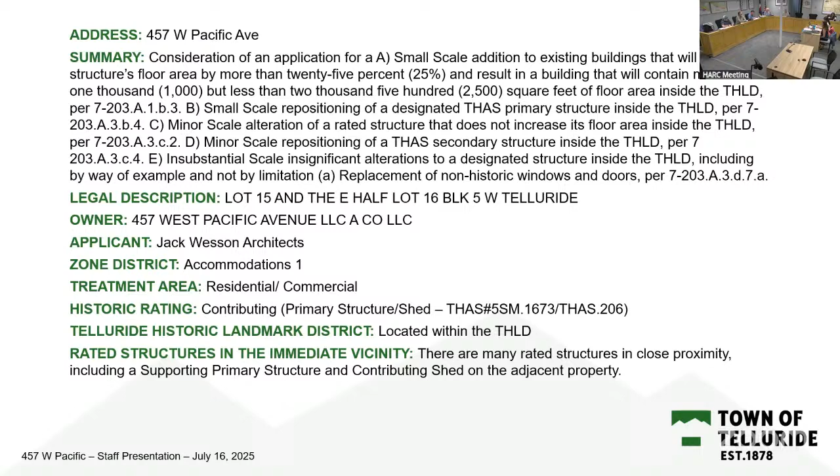That's just the high level for all of these projects. So we are looking at 457 West Pacific, as Mark stated. I will not review these items again. The only thing I'll add is that this is in the residential commercial treatment area, and we have two contributing structures on the property, a primary structure and a shed, which we'll talk about further later. This is located within the THLD, and there are a number of additional rated structures in close proximity to this property as well. So you see it here.

The site significance and context: 427 West Pacific is within the THLD. It's historically significant for its association with Telluride's residential development beginning in the early 1900s. And as I mentioned, both the primary structure and the shed are contributing.

The house and shed were built between December 1899 and July 1904 per the Sanborn maps. The house is architecturally significant and has only had a very minor loss of integrity. The shed displays a high level of integrity, but it is in a deteriorated condition. The gabled addition to the house's rear north elevation appears to date to a time frame between the 1960s and 1970s. It's a modest addition that's reasonably compatible with the house's original construction and minimally visible from the street.

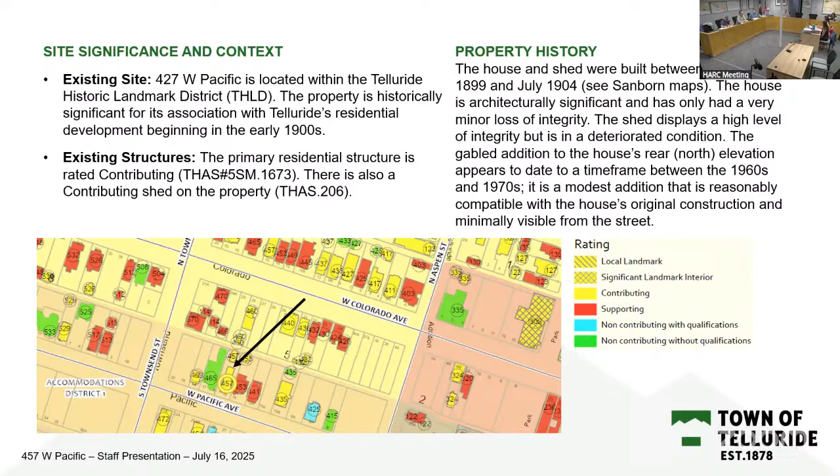HARC members have reviewed a detailed staff memo on the project, so I'm just going to quickly walk through key aspects. The project description: the applicant is requesting to restore and rehabilitate the contributing primary structure and shed, raise the contributing primary structure and shed, and also is proposing an addition and alterations to the contributing primary structure and shed. As you all know, the overall precepts of the design guidelines are to keep it simple, keep it in scale, respect historic resources, and make all new design compatible with the existing context.

For this particular project, the following standards and guidelines apply: rehabilitation, residential/commercial, alley, shed and secondary structures, and exterior and site lighting. The applicant has complied with a number of the guidelines and standards which apply to this project, so I'm not going to go through those they've already addressed. I'm merely going to highlight, for those present, those that need further revisions to become compliant, and/or where additional information is needed to make a determination on compliance with the design guidelines and standards.

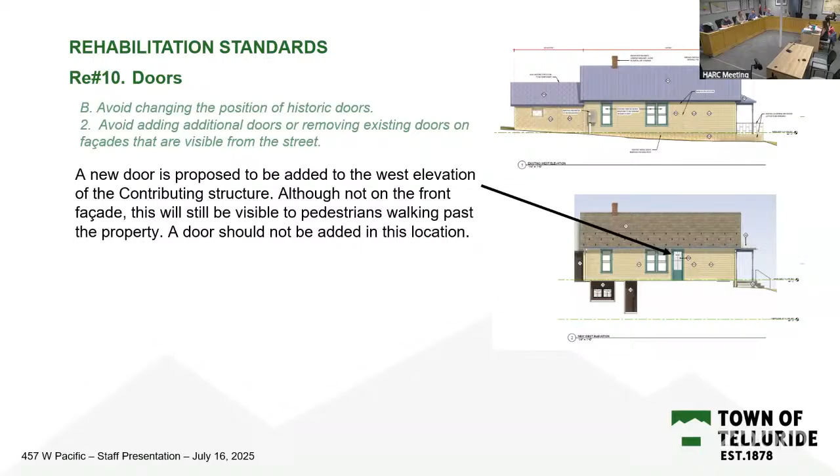Starting with the rehabilitation standards, number 10, doors. One aspect of that guideline is to avoid changing the position of historic doors and avoid adding additional doors or removing existing doors on facades visible from the street. A new door is proposed to be added to the west elevation of the contributing primary structure. Although not on the front facade, this will still be visible to pedestrians walking past the property. A door should not be added in this location. That's a staff recommendation, and you can see that here.

Rehabilitation standard number 19, new alterations and additions. The HARC board knows the provisions of RE 19. I'll just raise that the proposed new addition is not visually subordinate to the contributing primary structure when viewed from West Pacific Avenue. It's not compatible in size and scale with the existing historic structures on the site, especially the portion of the new addition that projects beyond the westerly wall plane of the contributing primary structure. Combined with the entire addition being significantly taller than the primary historic residence, this detracts from the historic character and integrity of the site.

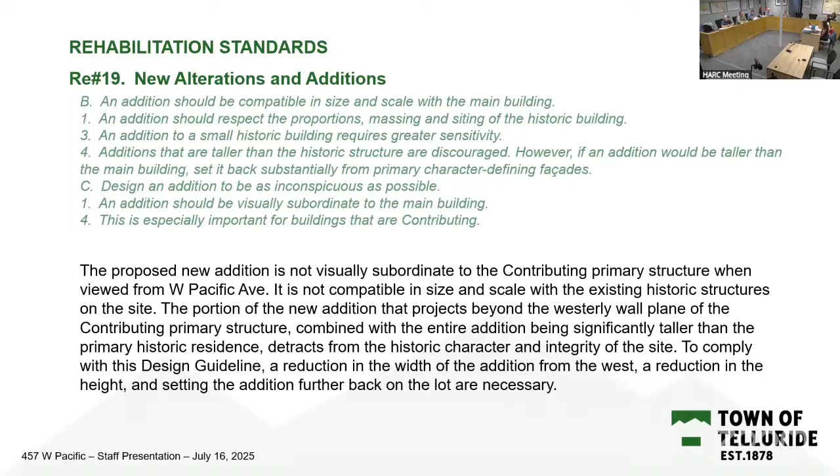And so staff would recommend, to comply with this design guideline, a reduction in the width of the addition from the west, a reduction in height, and setting the addition further back on the lot are necessary. HARC can consider whether some combination of those options are ones that you feel make this compliant.

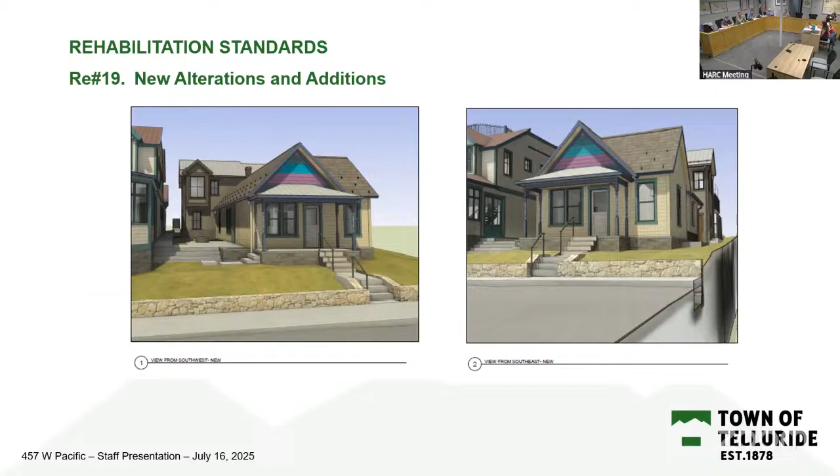And so you can see this is one view. I'm particularly looking at the west, but I would say the whole addition is very dominant, but especially from the west, you can see that here. I'll go quickly and then I can answer questions after the applicant presents.

So I'm also flagging very briefly in this presentation, and more detail in the staff memo, items that just need additional information in order to make a determination.

In addition, just additional information in order to address historic features and materials, historic elements, missing building components, windows, and wooden siding. We need some additional information.

We do have in sheets A1-0.9, A1-0.10, and A1-0.11 high-level annotations on the proposed rehabilitation, repairs, replacement, but we really need a detailed rehabilitation plan in order to be able to approve the project. This should include technical procedures to be adhered to, established procedures for determining the need for replacement only for elements beyond repair, documentation standards, etc.

So currently there's a lot of flexibility, as you saw outlined in the historic structures repair sheets. So concrete guidelines should be established to ensure that the integrity of the contributing primary structure and contributing shed are preserved and that replacement is minimized to the greatest extent possible.

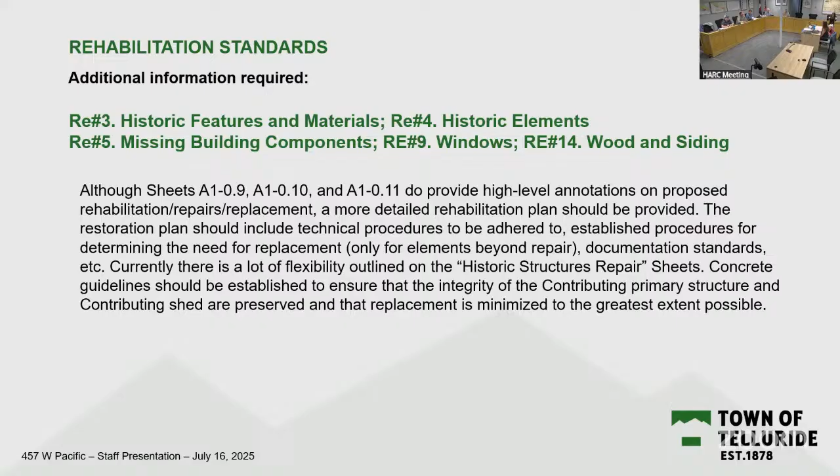I will say that I believe that's the applicant's intention. I just want to make sure that we have in writing what that detailed plan is, but they certainly are very focused on that rehabilitation. But I need to see the specifics in order to say we should allow what's being done to move forward.

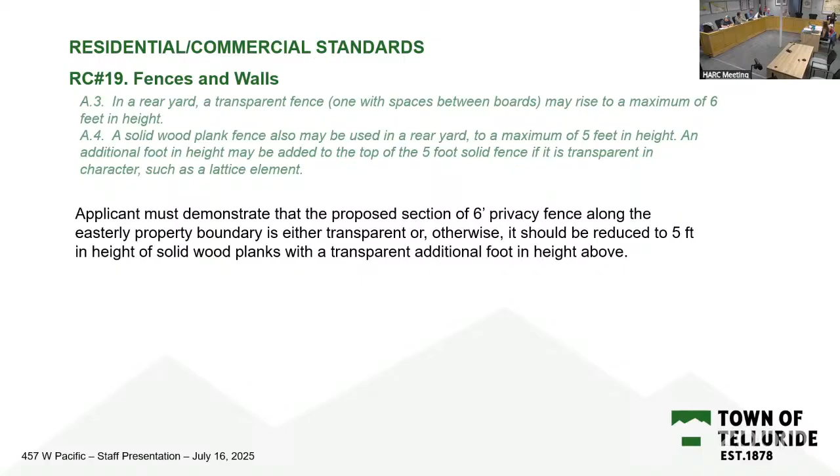Fences and walls, you all know the RC number 19. I've moved on to residential and commercial standards. This pertains to the fence. Applicants must demonstrate that the proposed section of 6-foot privacy fence along the easterly property boundary is either transparent, or otherwise it should be reduced to 5 feet in height of solid wood planks with a transparent additional foot in height above. So you can see it's just a section of fence, but it doesn't specify transparency.

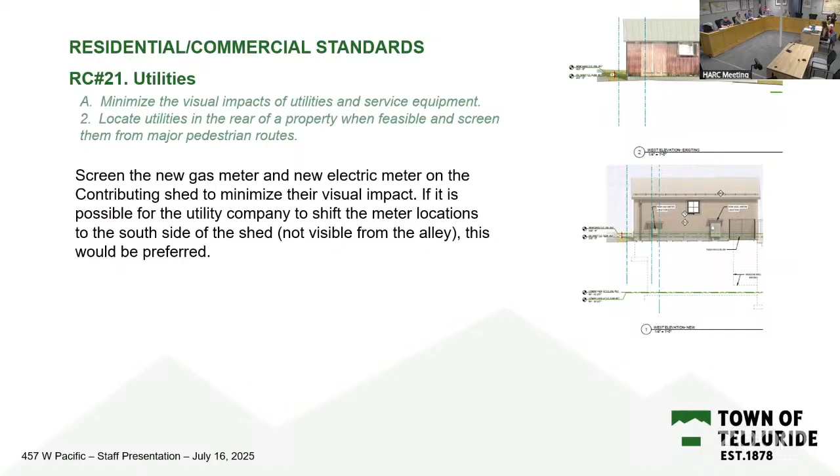Moving on to mass and scale, which we all feel should be number 1, but I'm doing these in order. You all know the guidelines. So...

Staff finds that the proposed new addition is not visually subordinate to the historic building. It changes the perceived mass and scale of that historic residence. You've heard me say this before when I was speaking to the previous guidelines in the restoration section. It's conspicuous from Pacific Ave, especially the portion that projects out to the west of the historic structure. And the height of the addition also increases the perceived massing and makes the addition feel dominant.

And then I'm also suggesting removal of a window on the south elevation because it really does add to the perceived massing and detracts from the contributing primary structure. So I'll show you that visually here.

Hang on one moment. I'm kind of going through two standards, so I'll go back to the one I just flipped through as well. Let me do them both at once, then I can show you some visuals. So RC number 31 is windows. You all know those standards.

And in addition to the mass and scale, as we look at the windows, which are character defining features, the placement and grouping should be similar to what's seen historically. And in this case, the amount of glazing on the north facade is extensive and should be reduced. They're visible from behind the contributing shed. The windows on the second and third levels are square, so we're also looking for more verticality.

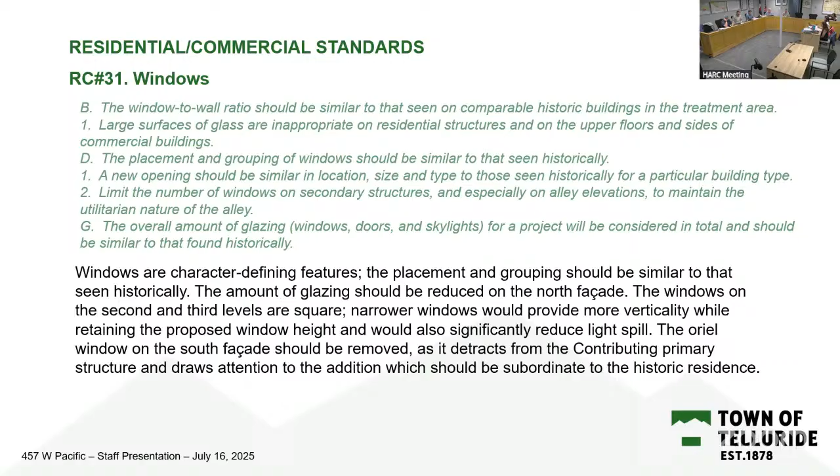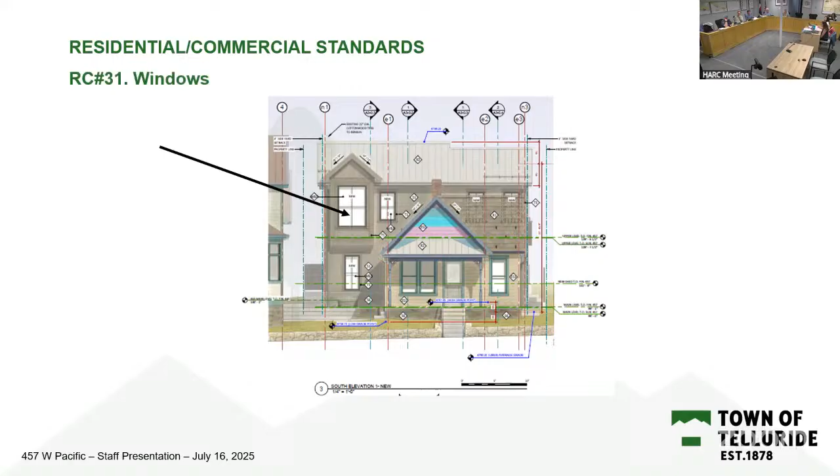And then I'm just pointing an arrow to the window I would suggest is inappropriate, and really it adds to that dominance of the addition that is proposed. And so suggestion to remove that.

Also in the residential commercial standards, additional information required. Plant materials, I've already said this, previous standard. And again, just looking for a more detailed landscape plan. And I added here that the replacement trees that are proposed, I just want to ensure that they're not going to block views of the front facade of the historic primary structure as they mature.

So there's a balance here. There's some trees being removed, just the location as trees are replanted, making sure that over time we're not losing that visibility. And I can work with the applicants on that.

Building materials, I just want more clarification on one of those specs for roofing, just to make sure that they are compliant. It wasn't clear. Visually, it appears potentially compliant, but I just want to be 100% certain, given that it's not clear in the list.

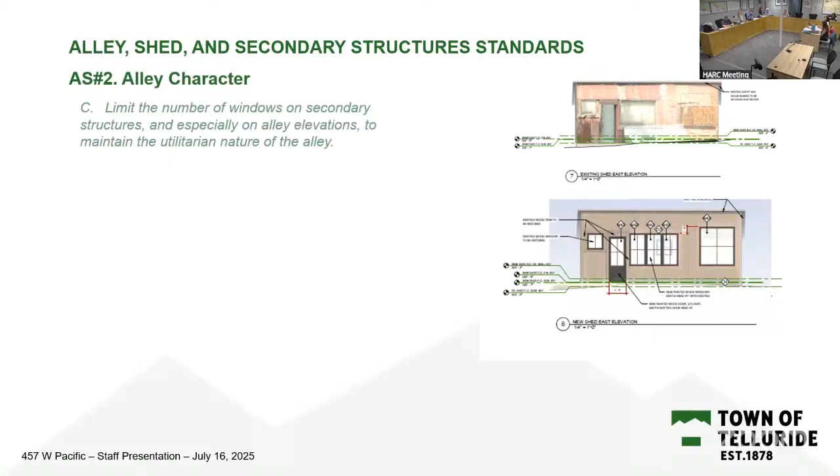Here, alley character, I'm almost there, guys. You know what the standards are. We're saying limit the windows on alley elevations to maintain the utilitarian nature of the alley.

So in this case, the east facade of the shed is proposed to have 5 windows. You can see those below, and above is the existing, including one large square window that does feel out of proportion and not in character with the shed.

I see that the applicant is trying to be consistent with existing openings to the extent possible, but that one window at least may not be - should be something we request to be replaced with something smaller and with more verticality.

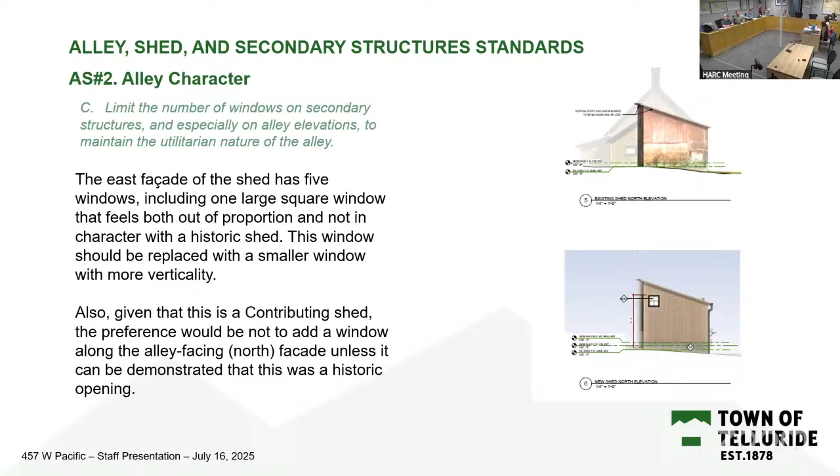And then on the side of the shed on the north elevation here, since this is a contributing shed, the preference would be not to add a window along the alley facing north facade, unless it can be demonstrated that this was a historic opening. This is not something we would prefer unless the applicant can demonstrate that.

So now I'm on the exterior and site lighting standard, AS number 2, interior lighting. So we're looking for that minimization of visual impact of light spill from a building, and large areas of glass and exterior walls that allow for that spill. We need to be attentive to.

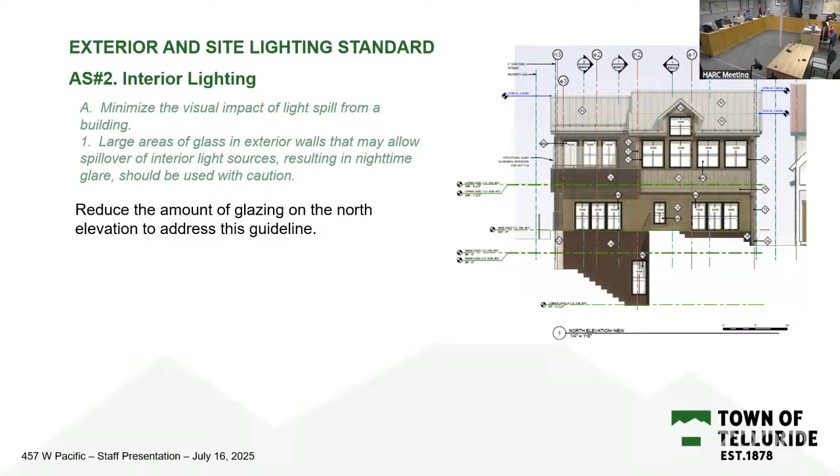And in this case, again, the shed is blocking to a limited extent a bit of this, but you have a lot of visibility from the alley towards the north facade. And so recommendation to reduce the amount of glazing to address this guideline.

Overall, as you all know, there will be Public Works, Planning and Building staff reviews. They've already reviewed to a certain extent the project, but after HARC approval, if it were to be approved, this project goes through another round of extensive review prior to building permit issuance. And any elements that fall into that timeline should not impede the HARC review process.

Staff will ensure that these items are addressed at the appropriate time, including things like drainage, site runoff, retention and filtration capacity on site based on final plans, landscaping, irrigation, a detailed utilities plan, on-site snow storage, all based on final plans. So I just always put that out there.

And so, staff findings and recommendations. The applicant proposes to rehabilitate a contributing primary structure and a contributing shed. The project is in compliance with many of the town of Telluride design guidelines and standards. And again, I just focused on those that need to come into compliance. In some cases, additional information is requested in order to determine and ensure compliance.

There are a number of conditions listed in the staff memo that would need to be addressed to come into full compliance relative to mass and scale, particularly to ensure that the addition is subordinate to the primary contributing structure. So in your packets, I outlined a detailed motion. I won't go through each of those elements here, but I'm happy to bring these slides back up as you talk through them later, if that's helpful for reference. Otherwise, you do have your one sheet reference copy there, but I'm proposing to continue to the September 17, 2025 HARC meeting with the conditions listed.

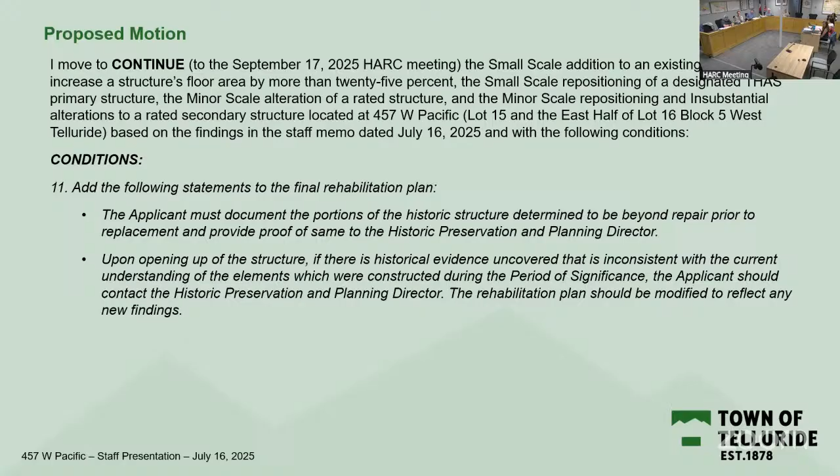The last condition is merely to add to the rehabilitation plan standard language to ensure that we as staff are able to keep an eye on the project as it moves forward. So you really have 10 conditions. The 11th is just pertaining to the rehabilitation plan. Thank you very much. Happy to answer questions after the applicant presents or whenever you would like.

I have a question. I think you covered all the relevant design guidelines, but I have a land use code question. On page 2 of the packet, where it shows 2,106 square feet of site coverage for the primary residence - does this include the 6-foot connector, or if it's less than 6 feet it doesn't count, but does it include the square footage of the connector?

It should, and I will double check that. Did you calculate this? We did as staff, and I believe it does, but I will double check it if that's something you're concerned about. Let me ask a bigger question - I got back yesterday and didn't have time to go back to the land use code, but aren't primary structures at 45% in this district for site coverage, not 50?

Aren't they 45%? I believe this says proposed 49.9 or 50%, but I thought it was 45. Well, I will double check that. Staff did review based on the land use code, but again, land use code is outside of the purview of HARC. I am happy to look - it's not supposed to be over.

It's not compliant. So I would ask staff - is it 45%? I believe so. So this is non-compliant and this is wrong. That's not right. Okay, go ahead. I need to go back and look because I can't confirm that on the spot here.

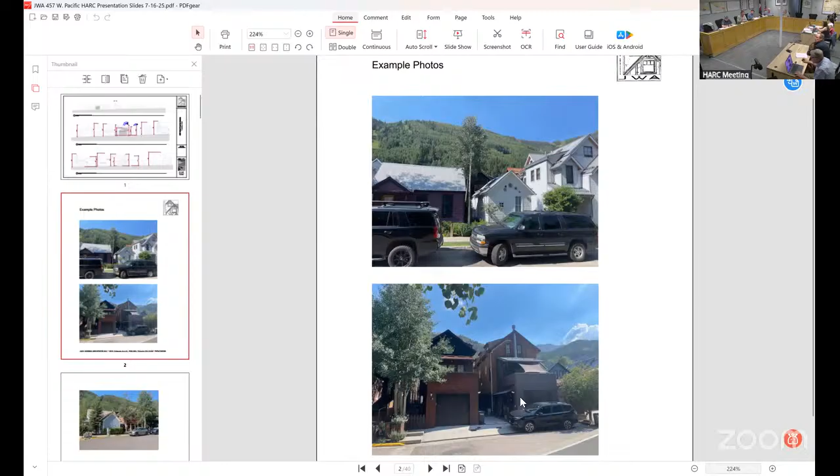These are just down the street. You can see the variation between the historic structures in the front and the additions in the back.

I want to go quickly through these, so spin your finger fast. This one right here is an example where the lot was a lot wider than the house, so they built the structure higher and taller. As you can see on the side, it's about 8 feet taller than the historic structure. That's an example of the addition visible from the side. Yours is 8 feet taller than the gable on the small historic cottage, right? That's correct, so this is about the same.

This one's not attached, just down the alley, same zoning, secondary structure. It gives us the idea of an improved secondary structure volume. On the lower one, just two houses away, the historic structure has a gable running east-west, which is actually kind of common on that street. There's a handful of them, so I didn't feel that having the east-west gable was unordinary. You can see the structure behind it is 14 feet taller, but because of the way the one house is in front of it, you don't really see it unless you're in the right spot.

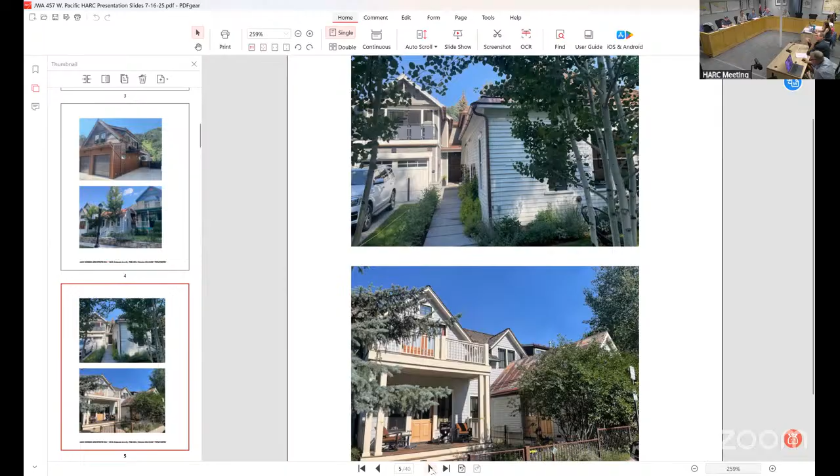Go ahead to the next one. This is an example of a couple, not on Pacific but on Oak. There's the historic house in the front with the new structures behind it and to the side. Those were approved right when I got on board with you.

This is an example of an addition onto a historic structure that went the full width of the lot, coming out on both sides of the historic structure. It didn't have a connecting link, so it didn't define as well what was old and what was new, which is an important distinction. I could get rid of the link and increase that volume, but I'm very sensitive to having two standalone-looking structures.

Next one. You can see also the back is actually 3 stories tall. Here's another one. Sorry, go one more. There you go.

This is just across the alley, on Colorado. So you have the 1-story, and then the higher structure in the back, and this is where the lot falls off. So you actually have 3 stories visible from the back on the addition, whereas I only have 1 and 2/3 story from the alley visible because the grade's coming up.

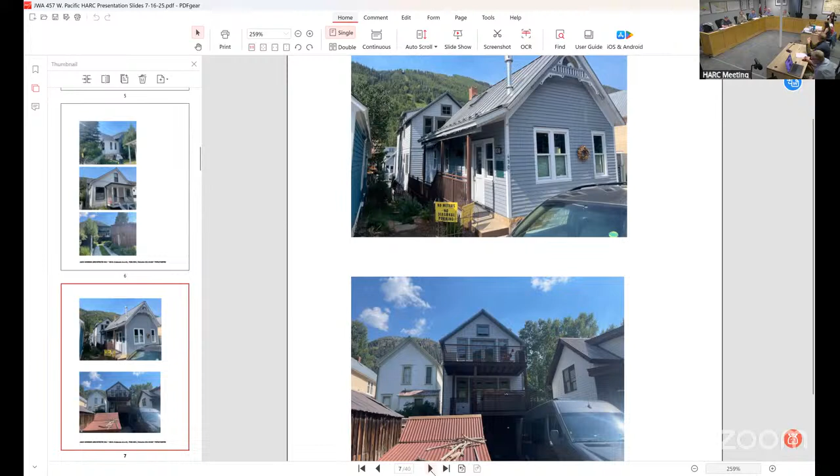Go to the next one. This is just an example of the addition on the right side of the historic house. Here they're about equal height, but there's no linking piece between them - one roof line merges into the other.

You may remember the comments, Mark, when we walked up with the guy from Denver - that gable was 3 feet lower than the main house, so subordinate meant subordinate. Well, you can see on the other one it looks about the same height, and they did add a dormer on the side of the historic structure as well. So there is precedent for adding windows on the sides. Here's the next one.

This is an example - you can see the addition on the side of the house, and then the addition behind relative to the house itself. So the addition is much larger in volume. Go to the next one.

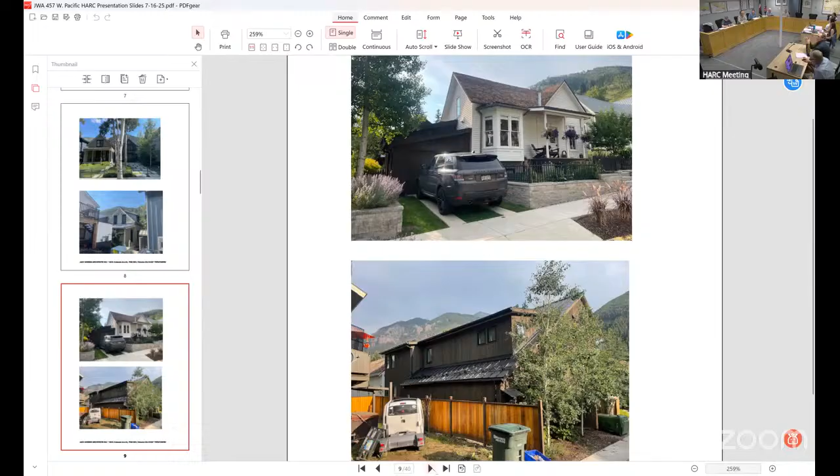I don't want to race through these, but here again this is the one-story house in the front with the addition in the back, which is 2 stories. You can see what it looks like in the back, the full 2-story structure. Next one.

Here's a condition where it's not as steep, but where you have the historic house on the downhill side. It's more common that the unit in the back is much higher. So here the unit in the back is a full story higher than the main house. You can see the length in the lower photograph - that's all one house. This is a very comparable situation, although the grades are a little more severe.

Here's another example: one story in front, with a slight grade going uphill in the back. The addition is 2-story in the back. Upper one, you can see the 2-story structure, the 1-story historic house in the front.

That was just approved the last 4 years or so. And then the one below the historic house, the problem is it has a linking piece to the historic part in front, but the part behind doesn't distinguish itself from the historic, so you can't tell apart what's new and old. That's the problem, although the massing is typical of having a 2-story addition.

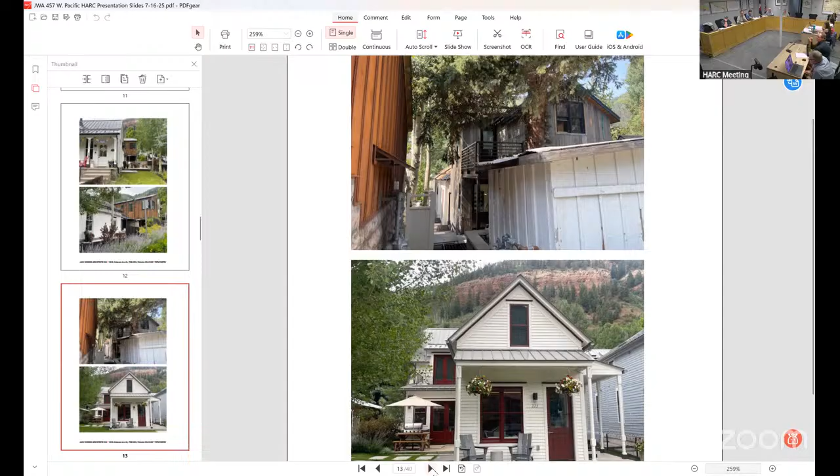There's just a couple more here, but there's a very common number of examples. The one on top, that's the 1-story off to the side. It's a 2-story addition. That's my house, that's another example. And below it, you can see the amount of addition onto the historic house. That was a 1.5 story historic house, but the addition's taller and larger.

So there's obviously a huge precedent for getting all of your zoning max allowable above grade on the back of these historic structures. Here's an example of one that's only half - we're only adding half of what we could. I hope that's appreciated, because I don't know what else to do. I just made a 1-story addition.

I feel very strongly, I'm just reiterating that there hasn't been a project with less mass added to one of these historic structures. And the location of the mass is set back from the alley 30 feet as well - it's not a full 2 stories from the alley. So I'll stop there.

And everything else we talked about—keep the meter where it is, but screen it, would be fine. I don't think we want to move the shed. We don't want to move anything else. So I think if that addition is simple, perhaps it moves a little bit less to the west, maybe another couple feet over, so it's not that big thing you see.

Because it is going to be visible. I walk that street every day and I know it will be visible. But I'm not sure there's really a need to reduce the height of it at this point. Maybe we can see that diagram and see what it does. Okay, that makes sense.

I think those are good points and I would agree with you. Okay.

I think I'll weigh in, but I think we're gonna want to continue and see this again because of the mass and scale issues.

Sympathy has nothing to do with it, but on the guideline about the new door, I agree with some of the comments that if we could see how far north you could move it. I have a way to write that if you want it: eliminate or move further north the proposed addition of a new door on this side.

Sounds like we're setting you up to make the motion. Uh-oh, so pay attention. Okay.

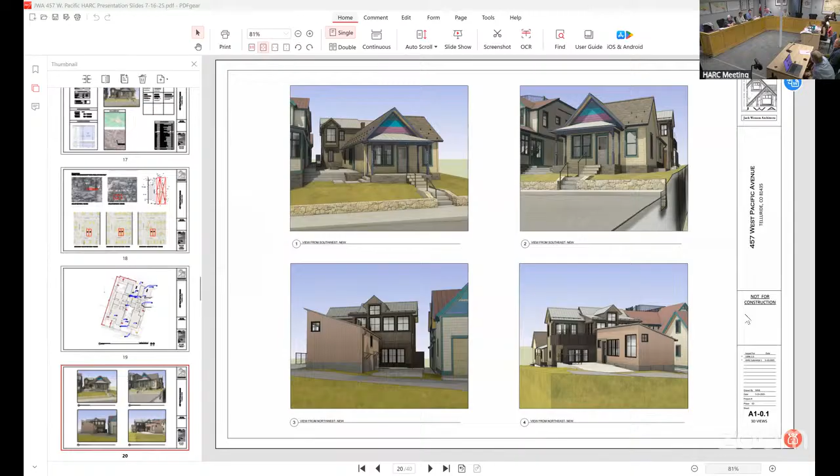Okay, we have a motion. I'll second it. How do you vote? Karen, yes. Stacy, yes. Matt, yes. Mark, yes. Bob, yes.

Thanks, guys. Okay, all right, thank you. Good luck.

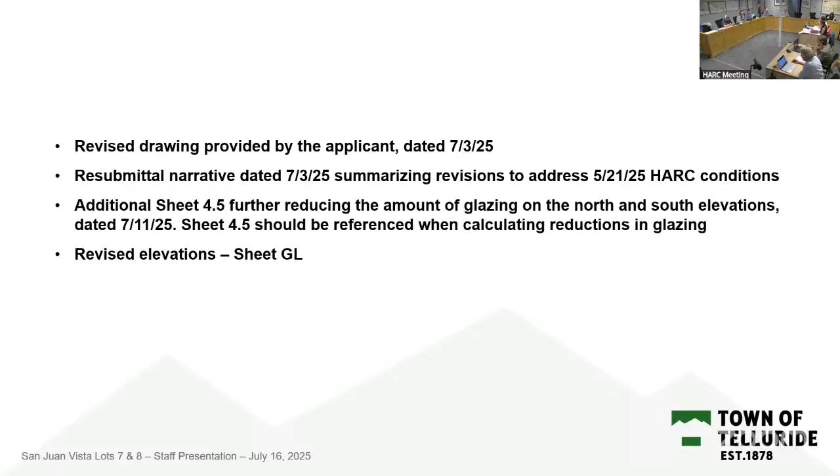Sheet 4.5 should be referenced when calculating reductions in glazing because they went much further than they had initially. They also subsequently provided revised elevations that were included in the packet and posted online at the same time as the original packet. They have since gone through and updated their entire packet, but I could not add that into what you saw and what was posted online at that date. So please reference those last 2 sheets for the glazing aspects.

Site significance and context, just to remind HARC members, but also members of the public: Lots 7 and 8 are located on the north side of Colorado, to the west of the Hotel Telluride and the south of the middle high school playing fields. Both are relatively flat lots.

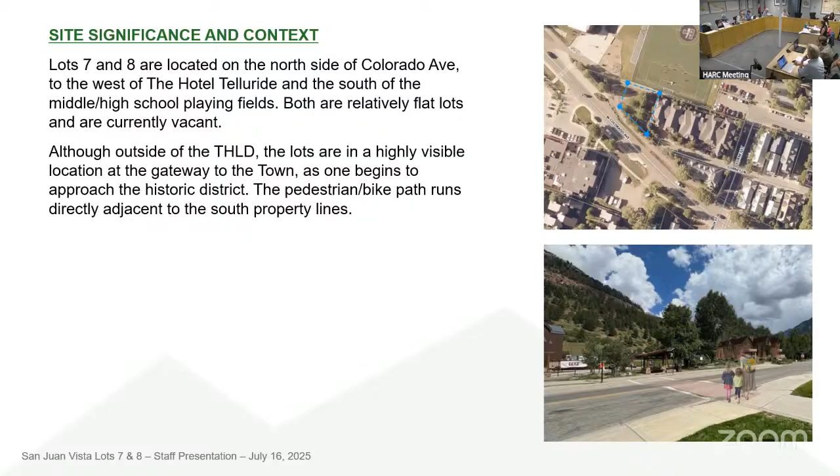They're currently vacant. Although they're outside of the Telluride Historic Landmark District, the lots are in a highly visible location at the gateway to the town as one begins to approach the historic district, and the pedestrian bike path runs directly adjacent to the south property lines.

The lots are part of the San Juan Vista PUD. They're located in the accommodations 2 zone district, which allows higher densities than the residential districts in town. The San Juan Vista PUD places additional restrictions on the lots while also allowing for some additional flexibility. For example, the PUD specifies a minimum and maximum number of dwelling units per lot.

So we went over the overall precepts of the design guidelines earlier. For this project, the accommodations standards and guidelines apply.

Project review to date, just really quickly: on December 18th, the applicant came for that HARC work session. On February 21st, the P&Z chair approved a minor subdivision per land use code section 6403B to adjust the interior lot line. This minor lot line adjustment provided the applicant with the lot configuration needed to design the project to be consistent with the design guidelines, while at the same time constructing at least the minimum required number of dwelling units per lot per the PUD.

So you can look at the surveys, you can see that lot line adjustment, and that followed from the work session discussion and made the project they're bringing forth possible and much more consistent.

On May 21, a HARC public hearing was held on the preliminary large-scale new construction. It was continued with 7 conditions. These are the 7 conditions. I'll go through them one by one quickly.

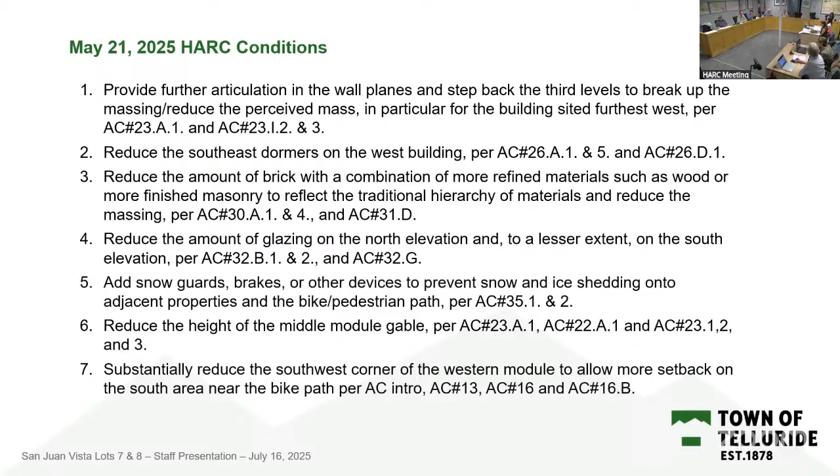The first one was: provide further articulation in the wall planes and step back the 3rd levels to break up the massing, reduce the perceived mass, in particular for the building sited furthest west.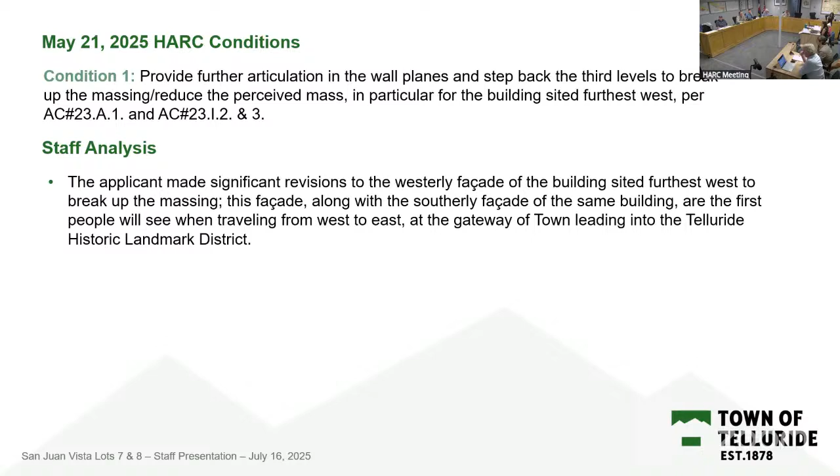I will have the applicant show the visuals. I know they plan to walk you through their revisions, but the staff analysis is that the applicant made significant revisions to the westerly facade of the building sited furthest west to break up the massing. This facade, along with the southerly facade of the same building, are the first people will see when traveling from west to east at the gateway of town leading into the Telluride Historic Landmark District.

In addition, as before, the project is divided into 3 modules to better reflect the traditional scale of construction. The scale of each of the modules is appropriate in the surrounding context. The buildings themselves step up from west to east. The center module has been reduced by 1.5 feet to provide a step up between the west and east modules. The PUD constrains the heights such that the lowest height is furthest west, and it steps up already, and they've just made some modifications to that.

The applicant has also employed porches, bays, and balconies to break up the front facades along Colorado and provide a step back from level 1 to level 2. This goes a little further, just on this one.

The others are briefer. In addition, to address condition 1, while the applicant has taken steps to address that condition, the front facades have not been revised to step back at the 3rd levels to minimize the perceived mass as viewed from Colorado. So you can see that there's a step from level 1 to 2, but not from 2 to 3 on the front facades.

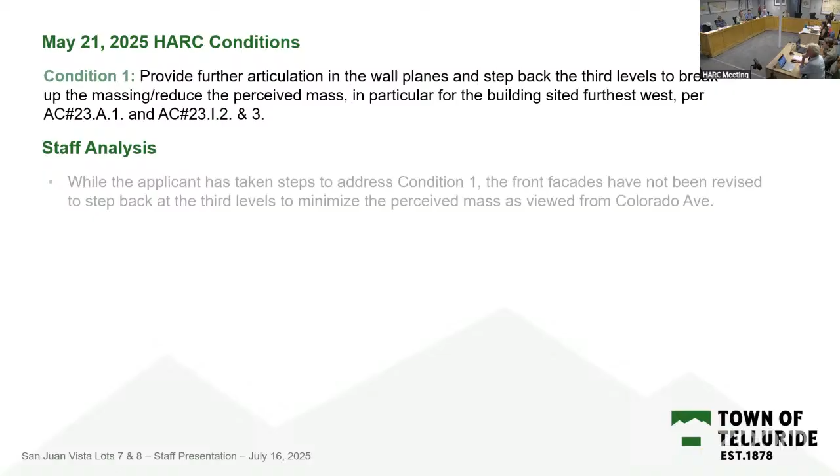That said, the cumulative revisions proposed could be found to make this aspect of the project substantially compliant with the design guidelines. So while they haven't met condition 1 in exact terms, they have reduced the perceived massing and achieved that through other approaches. HARC can discuss whether they feel further revisions are needed to address condition 1, or whether the revisions made reduce the perceived massing to an extent that the intent of this condition has been met. Staff would suggest that condition 1 has been met, and you can discuss further.

Happy to answer questions. Condition 2 is to reduce the southeast dormers on the west building. The staff analysis is that the southeast dormers on the west building were moved to the west side of the building, so the width of the southerly dormer was reduced. The width of the northerly dormer has not changed.

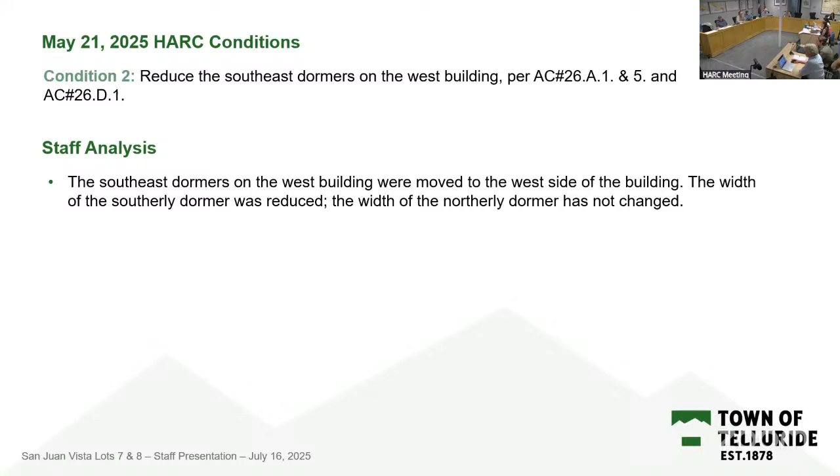So the applicant went a bit further and actually changed the location of those dormers. As the project has been revised, HARC should determine if any further changes should be made to the dormers now located to the west of the west building. Staff would suggest that the project is compliant with the design guidelines as revised, and condition 2 has been met.

And again, comparing from the prior version to today, the massing has been broken up in a number of ways, and the initial approach is much improved to the extent that we could see approving.

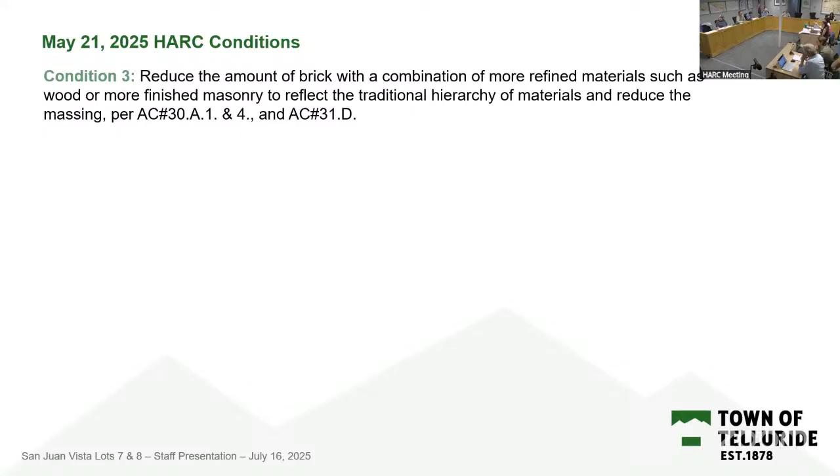Condition 3, reduce the amount of brick with a combination of more refined materials such as wood or more finished masonry to reflect the traditional hierarchy of materials and reduce the massing.

To address this condition, the applicant replaced the brick initially proposed for the upper gables of the two easterly gable forms with siding - vertical Hardie board painted beige - better reflecting the hierarchy of materials and reducing the massing. The building to the west retained the brick for the upper gable. That said, this building is lower in height than the other modules, and the westerly facade does now include more variety and materiality. The amount of brick has been reduced overall, and so one could find that condition 3 has been met, and that would be staff's recommendation there.

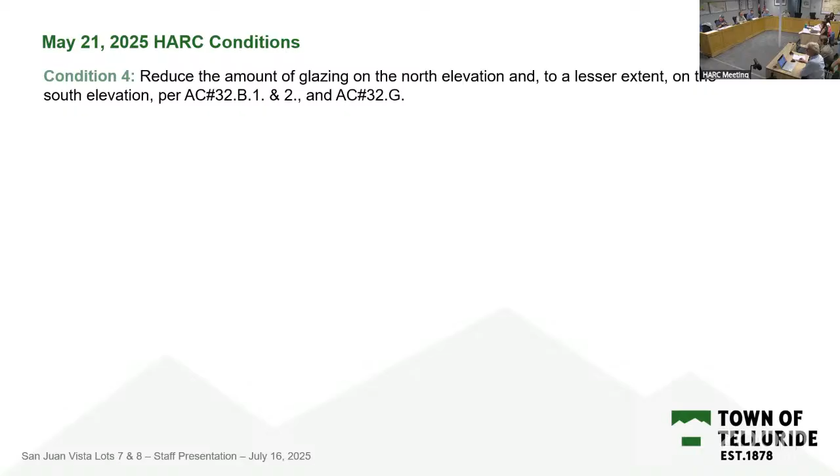Condition 4, reduce the amount of glazing on the north elevation and to a lesser extent on the south elevation. So again, when the applicant first brought forward their packet, they had made some reductions, but staff didn't feel that this was far enough. And so we met with the applicant and they reworked the amount of glazing.

So the north elevation now has been reduced from the originally proposed 312 square feet to 214 square feet, a reduction of 31.4%. And the south elevation has been reduced in terms of amount of glazing from the originally proposed 327 square feet to 255, a reduction of 22%. This will reduce light spill in the directions of the sports fields and Colorado Avenue. Staff would recommend or suggest that condition 4 has been met.

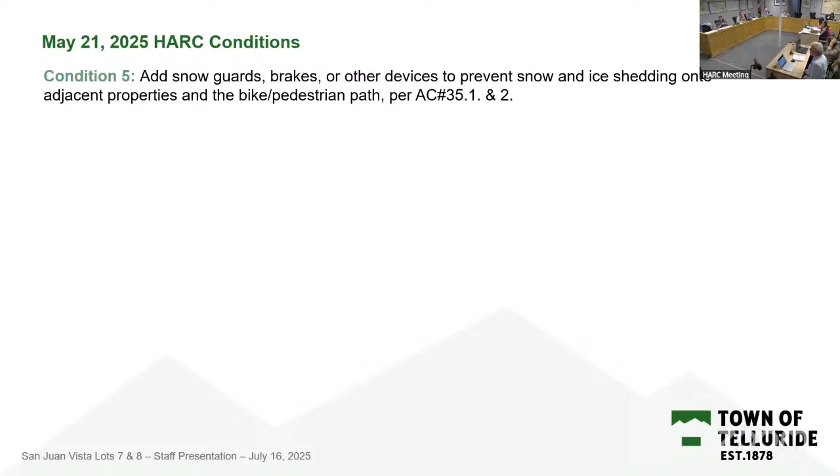Condition 5, add snow guards, brakes, or other devices to prevent snow and ice shedding onto adjacent properties and the bike pedestrian path. The applicant has added snow guards along the east and west edges of the roofs to prevent shedding on adjacent properties and onto pedestrian walkways. You can look to sheet 1.2 for a reference.

Given the close proximity of the buildings to the pedestrian easement that runs along the north of the two lots, snow guards, brakes, or other devices should also be added to the roof segment that joins the center and east module along the north and south edges of the roof. It's a small section, but that might have been just something overlooked by the applicant. So condition 5 has been addressed to a certain extent. Staff suggests revising the condition to request the addition of snow guards, brakes, or other devices for the connector roof along the north and south edges.

Condition 6, reduce the height of the middle module gable. The height of the middle module gable has been reduced so that the ridge is now 1.5 feet lower than the easterly module. HARC can determine if that was sufficient.

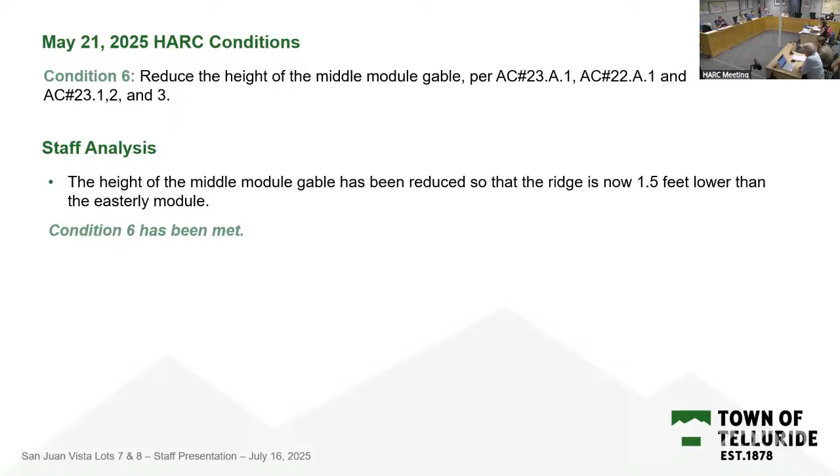Staff finds that condition 6 has been met. Condition 7 is the final condition: substantially reduce the southwest corner of the western module to allow more setback on the south area near the bike path, per AC 13, 16, and 16B. The applicant has substantially reduced the southwest corner of the western module to provide a greater setback from the bike path. I'm assuming the applicant is going to show that visually, so I didn't want to do it twice. Staff would suggest that condition 7 has been met.

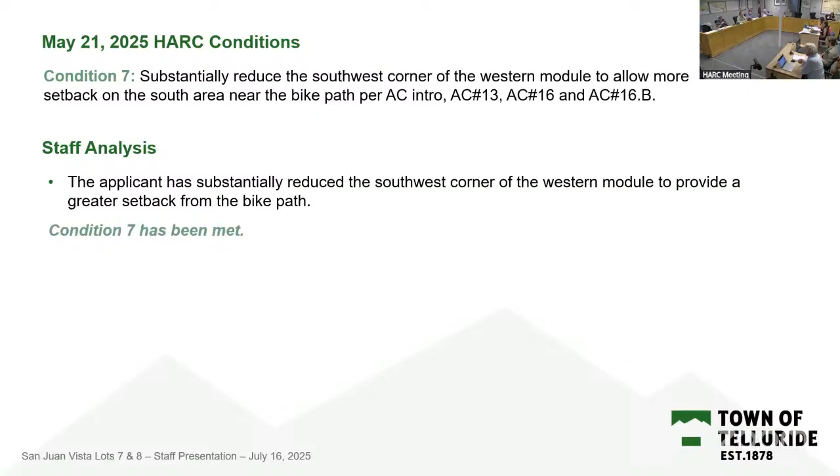This is the general statement that if this project were to be approved by HARC, there is building planning and public works further review prior to building permit issuance that will address a number of items later in the process, including meeting all standards for buildings in a flood zone AO, and permanent drainage of site runoff with specified retention and filtration capacity on site based on final plans. I won't go over this in detail—a lot of it is covered more extensively in the staff memo that you've all reviewed thoroughly.

Screening is also an item that will be further worked through. So, staff findings and recommendations: this is at the gateway to the town of Telluride's historic district. For this reason, thoughtful development of these properties is especially important to ensure visual continuity from the west edge of town to the historic core. The revised submittal addresses the conditions from the May HARC meeting, bringing the project into substantial compliance with the design guidelines, with one condition. I provided you with a proposed motion. There were a few items HARC may want to discuss further to see if you agree they've come into compliance, and you could add additional conditions.

But the one flagged here is the snow guards for that one segment of roof. So I'll stop there—the applicant is going to share the visual piece, and then I'm happy to answer any questions.

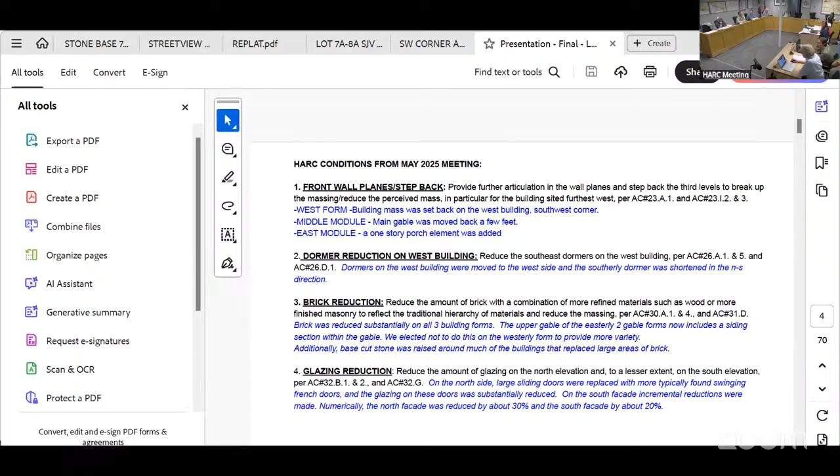I'll need to see it as well to be able to respond. I also have these here. Matt, did you calculate when you go to the west, how far is it versus the 20 feet on the west end? Do you know? No, they can tell us. Yeah, I don't know. It's something I just picked up right before the meeting.

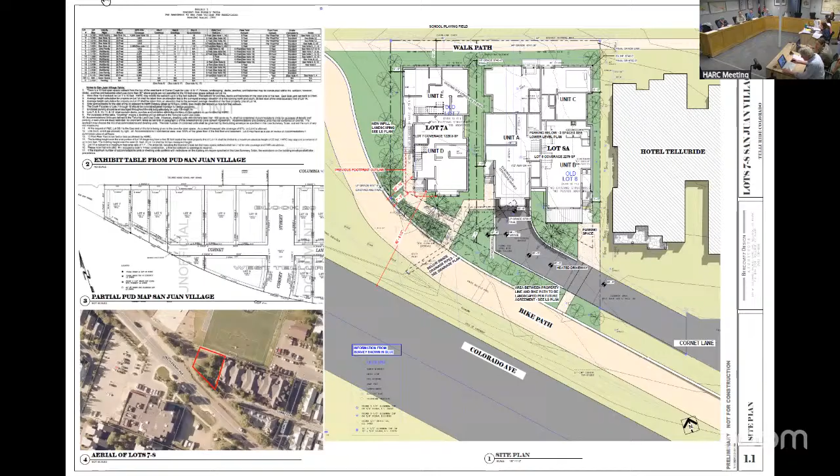So if you zoom in on the driveway there. You guys—control zoom. Sorry, just control scroll, yeah, just zoom on that a little more. Can you zoom a little more? Too much.

Okay. We're not allowed to have dialogue with the applicant yet, we're still with Kristen. Can you restate your question just so I can hear? Sure—what I'm curious about is the front 20-foot setback line, which is parallel with the property line, but at the western edge, essentially where it intersects the building, it takes a jog to become perpendicular with the new internal lot line. That setback line should continue across and be parallel the entire time until it intersects the western setback line.

20 feet back? No, it was actually—in the plat, the replat, it was specified this way, and I forget the nuance. Am I allowed to talk yet or? No, not really. All right, I'm okay asking. Well, it's a question. Well, we're with Kristen, are we gonna—oh right, applicant, right—or where we wanna be?

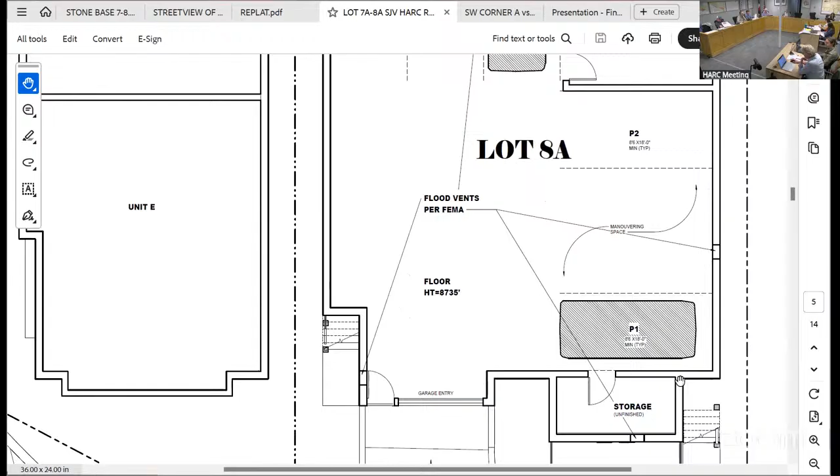Sheet 3.0, I interpreted as a basement. Is 3.0 a basement under 7A, under proposed lot 7? Is that a basement or a crawl space in lot 7? It's a basement, I'm sorry. Oh, it's a basement. Therefore, I calculate the site coverage is 1,800 square feet, which is not compliant with the 50%.

So staff did do these calculations and found it to be compliant, but we will review and ensure compliance. I think what you did is I can see your calculations, 1,225, if you agreed with the applicant, that's the first floor. But you have to take it from the basement, which is 1,800 square feet, so it is not within the 50% site coverage. It is not.

So I counted the basement as 1,444 square feet, so it's less than yours. It's still over the max. Yeah, so staff will go back and review that more thoroughly, and work with the applicant should there be any land use code compliance issues. We will go back and look through that.

Okay, we'll move on to the design guidelines unless there's other questions for Kristen.

Would staff be able to respond on these two land use code issues tomorrow to the board? We certainly will, and we are, yes, absolutely. Tomorrow. All right, thank you.

I can't get this to keep coming down. Okay, so we'll turn over to the applicant. Ron, if you go ahead and read your name into the record and then give your presentation.

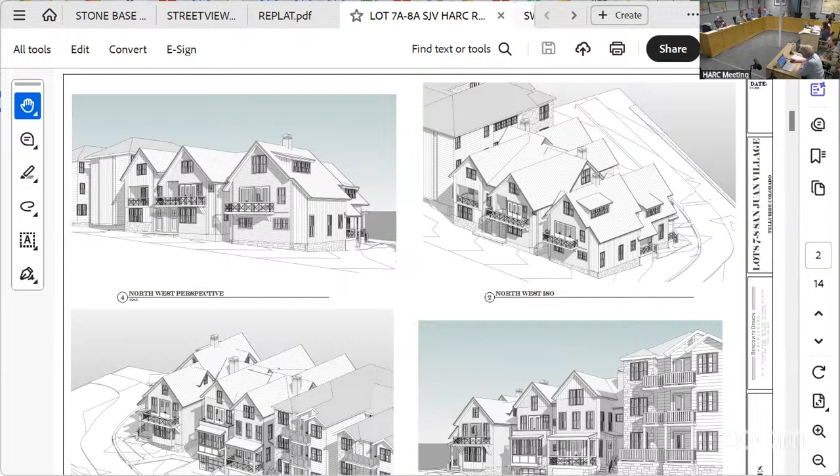Ron, could you start with where we left off commenting on Matt's question about the 20-foot setback from the property line, now that we can speak?

Yeah, I think that's best shown, because it has everything to do with this design. The property was replatted in January, and in that replat the setback was specified as drawn, and we have complied with that.

So there was, probably should have that replat included then. And kind of what happened was that as the lot shifted, you were previously allowed to build all the way back to that horizontal line. And then as you shifted, instead of losing that amount of buildable land, the buildable land stayed with the location there.

Let me just—but regarding that, according to Kristen's report here, that west setback is at 5 feet and the requirement is 10 feet. That's not waived by a PUD.

Oh, okay, I thought he was talking about lot 8A. He's actually talking about, see, this is the previous configuration. And if I can draw a line here.

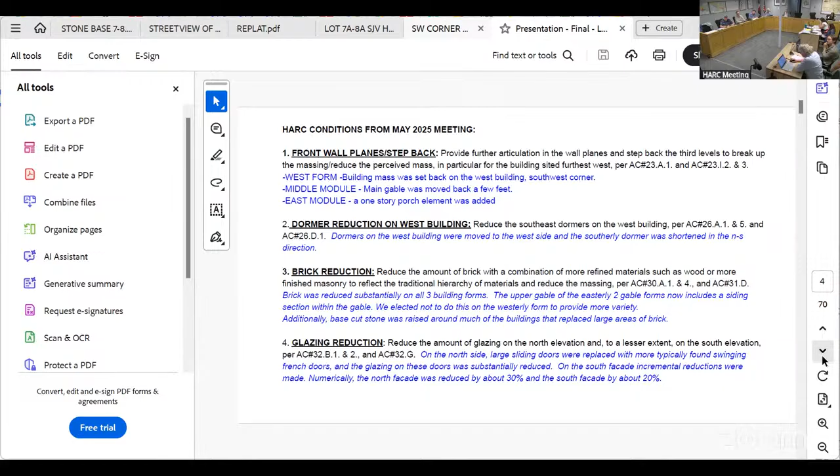All right, the first one is the front wall plane step back. Last time the discussion centered on the setback relative to the center module here that I'm identifying. If you look at the previous version and then the updated one, we pushed back that center form.

On the easterly module, we added a porch which breaks up the verticality of that plane. So no porch on this version, and porch on this version. By the way, the guidelines do, as we noted last time, require a change in wall plane. Balconies and roofs by themselves, I know this because it was fresh in our mind, we rewrote these guidelines, do not suffice.

On that middle building, the easterly one was not identified in the last meeting as a massing issue, there was no discussion on that, there was only a condition. So that's subject to discussion. And then really the westerly module...

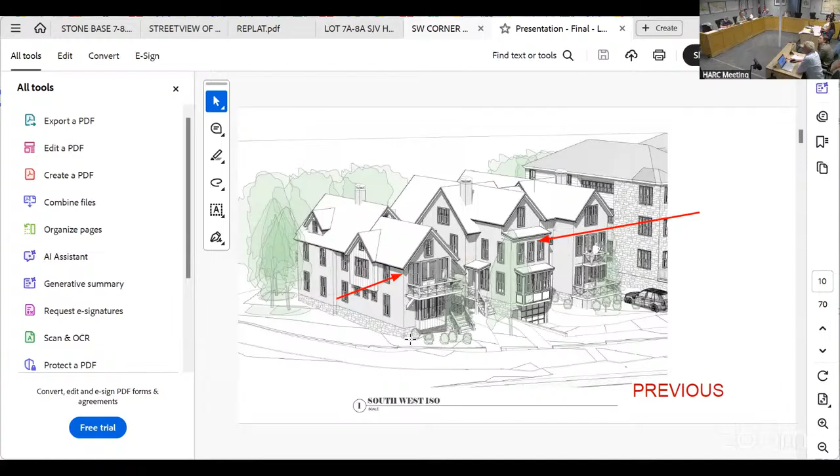As you can see in the previous version, the issue was that it was a strong two-story facade all the way up at this corner here. This whole facade has been shifted to the east, and then there's a setback of the plane of the westerly element here. Keep in mind there's also a major setback in the form back here too.

In defense of this, the guideline aside, we're looking at strong forms, brick forms. I don't think a brick form should be broken up into little chunks that need to express its strength as a whole. We can use things like porches and overall building setback to achieve that, and bay windows. That would be my argument, as well as the fact that there's a substantial number of historic buildings in town that do have a strong two-story, sometimes 2.5-story verticality, single plane in the front.

Let's move on to the dormer reduction on the west building. That one's pretty cut and dry. We had two dormers before that were wider, and as we repeated that same element with the redesign of the west building, the dormer became shorter.

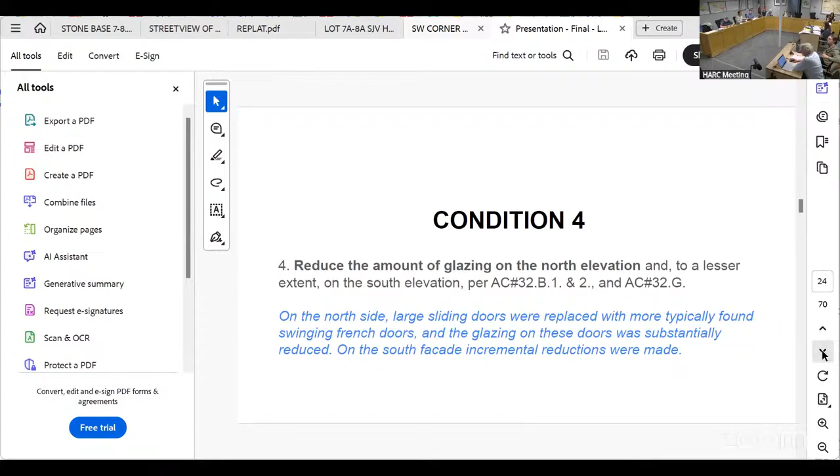Okay, the amount of glazing that we talked about. I think it was reduced around 30% or 32% on the north side. The bigger issue on the north side was that the large sliding glass doors were replaced by normal French doors. On the south side, it was just incrementally reduced with multiple elements.

Condition 5, snow guards. We supplied snow guards on the sides. There is one little area here on the north side that does require a bit more attention.

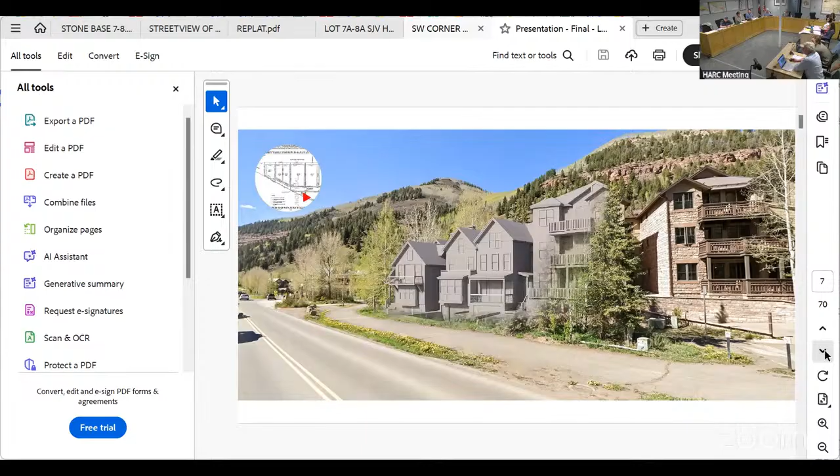I wanted to show this exhibit comparing the southwest corner side by side. As previously designed, it comes up as a hard rectangular, intense corner on the far south. On this side, it's softened, the mass has been moved and shifted over to the east side of the lot.

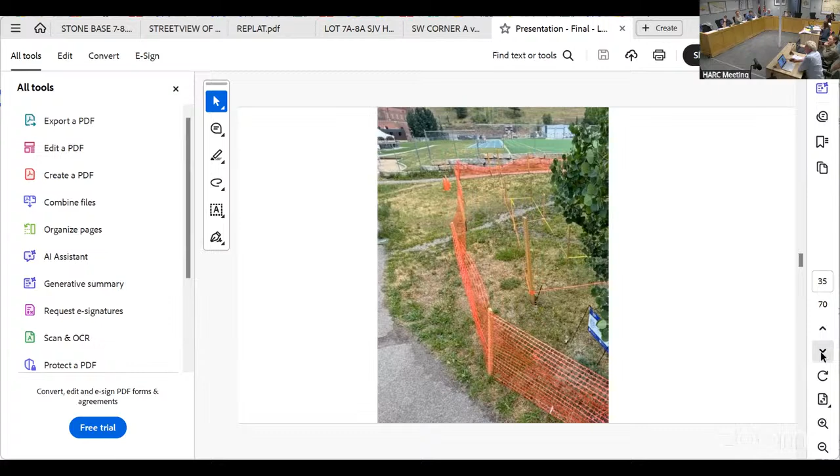Here it shows with highlighted lines how much it shifted. And then we actually staked out the corner, and you can see the final location in yellow tape shown there.

So that's pretty much my presentation. I'm glad to answer any further questions.

The only other thing I wanted to mention is there's a degree of urgency on this project in terms of the adjacency of the school property, trying to get our construction done in a logistical manner relative to the school year coming up. So there is an issue there.

You mean finish it this summer before school starts? Exactly. Okay, got it. Yeah. Okay, thank you, Ron. Okay, you're welcome.

Questions? I have a question. Related to the site coverage, Ron, can you bring up your site coverage diagram or describe it? It doesn't look like you're including the basement. Can you either answer that or show us what you're counting?

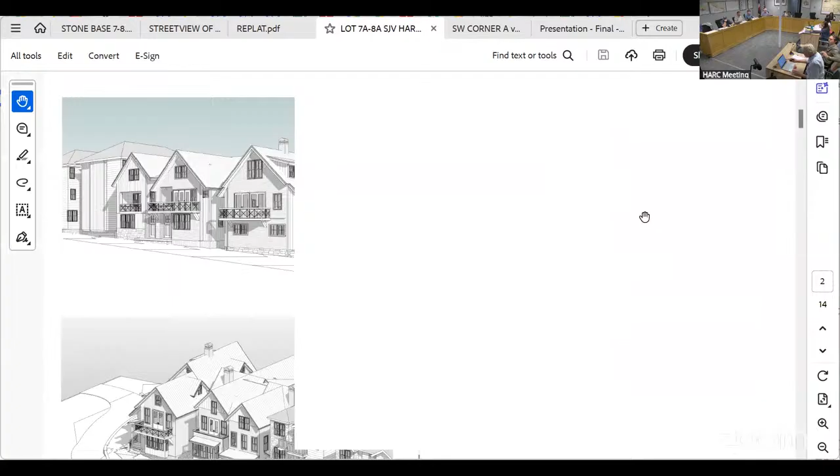Let me just clarify that the first floor is what was used to count site coverage. The basement was actually pushed out under porch areas that normally don't count for site coverage. I think that's the problem, that those areas of the basement encroach under the porch areas that don't count.

Is there no basement except under porches? As you can see here, there's a basement that was pushed out underneath a porch. So this is a basement, and it was pushed out under the porch.

If that counts toward site coverage, then that does need to be adjusted. Does that exceed 10% of the floor area, the 10% basement bonus? I don't think there's a site coverage increase in this zone. No, because that basement is not completely below grade since it's visible, it counts all of it.

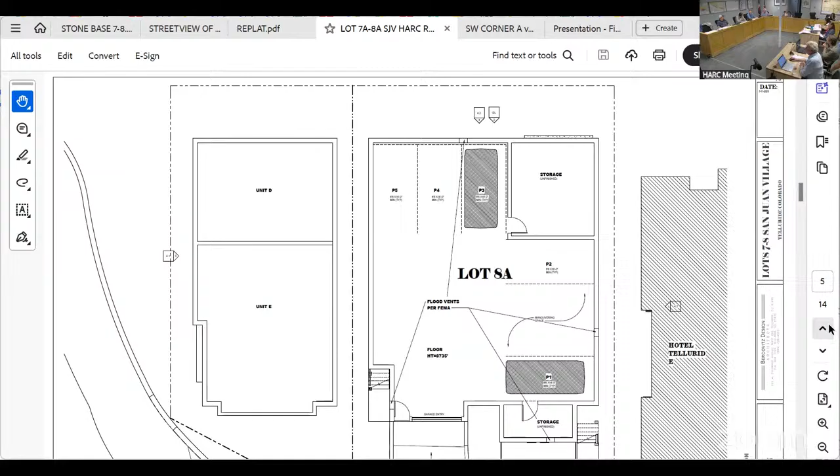Other questions? Let me see if I've got any more. And you did say that under lot 7A, that is a basement, correct? Yes, it is. Okay, thank you, those are all my questions.

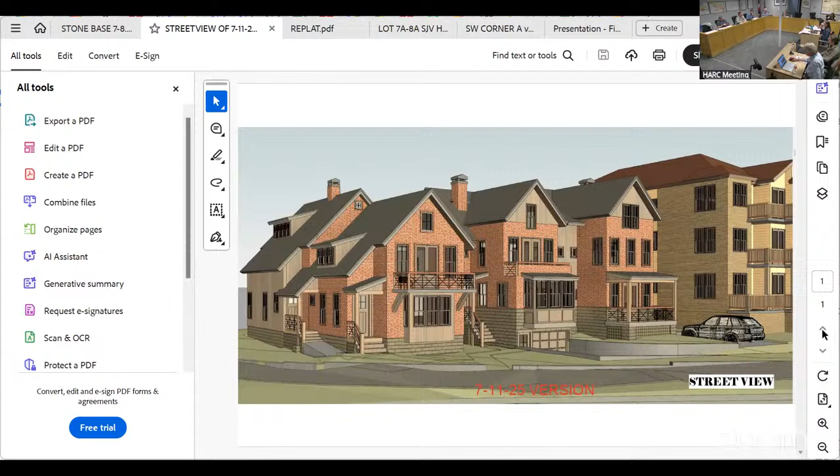Provide further articulation of the wall planes. I think 6 will be the one we spend probably the most time on besides 7, the corner. But I think the middle module, taken as a whole - the bay, for lack of a better term - is significant enough that it establishes its own plane. There's then a step back to what's essentially the deck railing, and then a step back to the 3rd level. I think there's 3 steps in plane there.

What about the east building though? The east module? There's no change of wall plane. I agree, but look what's next to it. The porch roof. I mean, I know how adamant we've been that we want to see that step in wall plane from 1st to 2nd.

But it really does create a weird condition at the corner, where now the corner jogs. I don't know, to me this looks like a simple rectangular form, and articulating that wall plane makes it more complicated than it needs to be, for the one further east.

And you can see what it does. I mean, just compare it to the middle one, right? We've got this jog, we've got a rail. It complicates that corner, and I don't think we need to repeat it. It's okay, I'm okay with it at the middle, and I'm okay with it, but I don't need them both to be so busy.

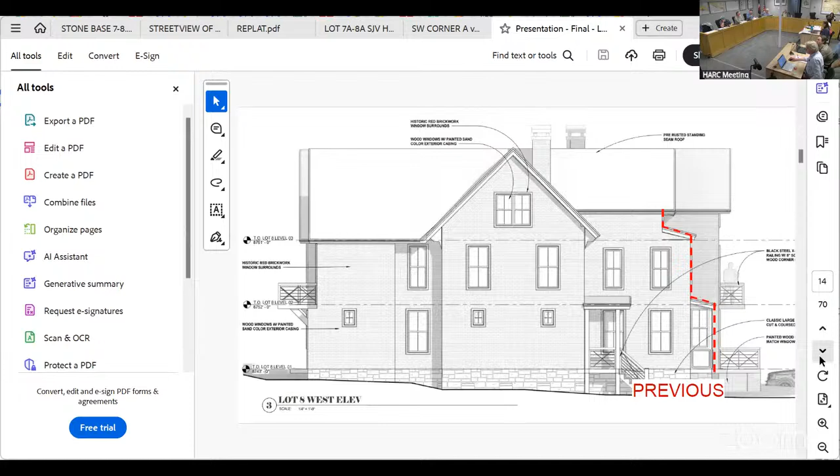I talked about 1, 2, they met because the dormers are substantially reduced. They reduced the brick significantly enough for me. The glazing has been reduced substantially, so I'm good with that. Snow guard's great. Although just from a practical standpoint, it may not be enough; just provide breaks where there are pedestrians. You might want to keep it between the buildings.

And then we just talked about 6 and 7. So I think I support staff's single condition. Okay, Kiernan?

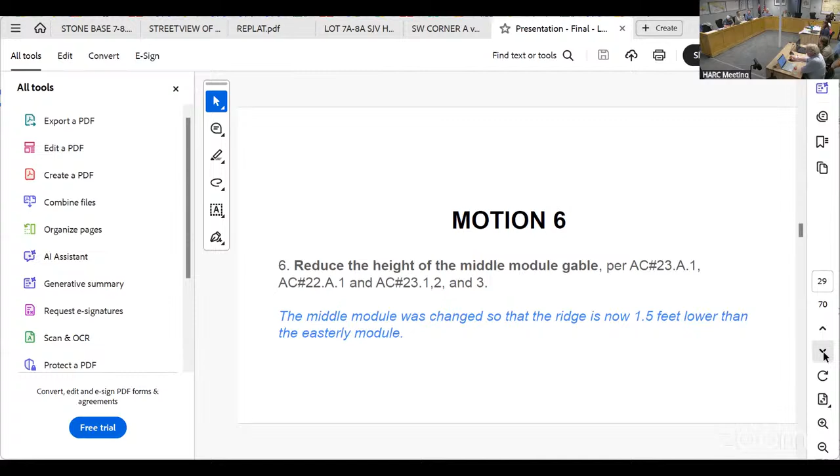Well, I was all prepared to say that the 3rd floor should be stepped back, but - sorry. No, it's okay, that's what we're here for, we're here to debate. Kind of a compelling argument, I think. What about the rest of the conditions?

Let's see, the corner - that one corner is still - I could see improvement there. Southwest corner. Yes, thank you. So you'd be in support of keeping the requirement for a 10-foot setback there from the west on lot 7? I don't know if I would go that far per se, depending again if there's more improvement to the southwest corner. Well, we'll see where that goes.

Yeah, I mean the land use code says 10 feet, so it's up to us. Okay, what about - Kiernan, relate to this - the brick on number 3, and Chris suggested that it's been met, they removed it from the gables. But I'm having trouble getting around what it says on 30.

Section 30, where it says 30A1, that the heavier coarse materials should be used as foundations and more refined materials used above, especially at the gateway. I'm just curious.

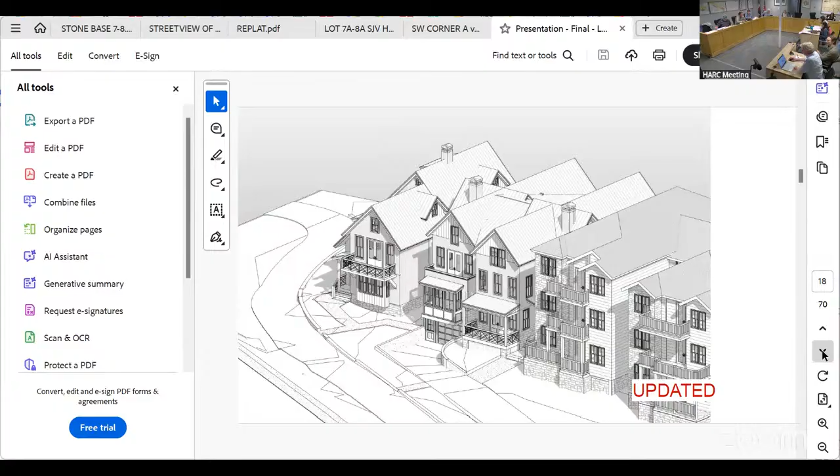I wasn't a big proponent of the brick having to go away last time, because brick is a historical building material. It's accepted within the town. And if the whole house is made out of brick, then the kind of hierarchy of materials just doesn't apply - there's just one material, not really a hierarchy. So I think it's fine.

Okay, Matt? Staying on the brick topic, I think the only suggestion I would make is in the southwest corner where the brick steps up to the upper gable in the back. That seems a bit odd. Now, I understand that's part of the geometry of that brick form, but it seems a bit out of place to me, having brick up high intermingled with the wood siding.

So that's my only comment on materiality. I think they reduced the amount of brick, and there's enough differentiation between the forms, the decks, and the glazing.

The main thing I'm still going to bring up is I do not think they moved the southwest, southern piece back far enough. So I would reinstate the old number 7, and potentially give them a distance.

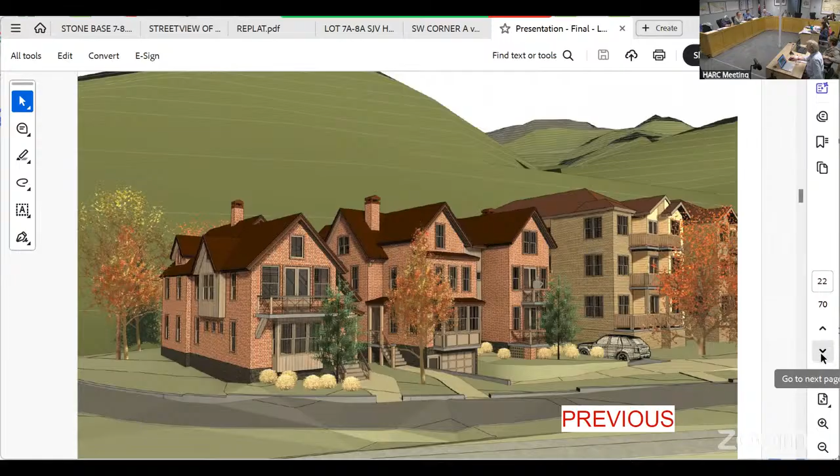To me, it's more about moving that whole face back a substantial amount than to step it up or step it back. But I do feel that if you stepped it back on the second level, it could also protrude a little bit more to the south. So there's a play there.

The brick gable in the southwest form - could you go back to the other drawing? So I think that whole form needs to go back significantly. I think last meeting I said something like a third of the site. So whether it needs to go back 4 feet or 10 feet, or folks don't think it needs to go back at all, I feel it needs to be significantly moved off - the front facade, the whole front mass just needs to go back.

Now, I don't think it's that important that they put a step in that facade or articulate it. I think it reads as the 2-story element, and that's fine. But if they were to step it back on the second story with a 4-foot jog, then I think it could come a little bit farther to the south. So it's a play - if they want to step it, the whole mass doesn't have to move back as much. But if they don't want to step it, I think that mass needs to move back significantly. And if they do that, I am fine with dropping that setback from 10 to 5 feet so they can spill out on the northwest corner as they're showing, and capture that square footage.

So just so I understand - can you zoom in on that, where the southwest corner where the property, where the porch is, the front porch? Could you go back to that plane? Floor plan, site plan - the previous page, you just had it up. Would you zoom in significantly on that southwest corner?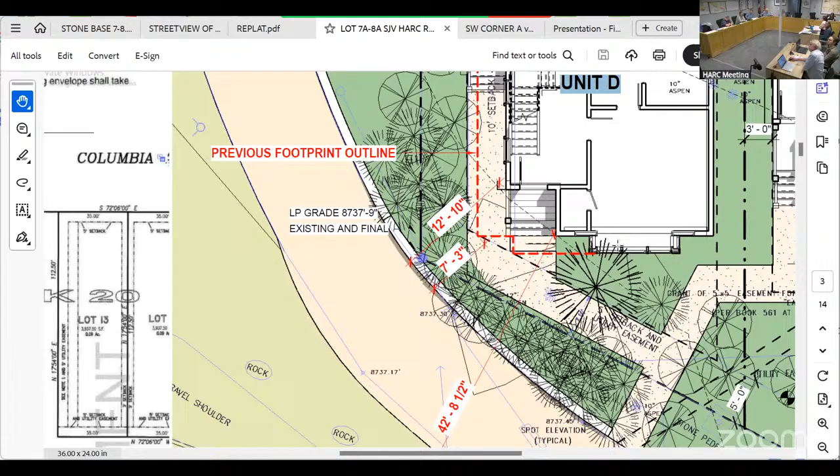To me, the proximity of that entire mass to the bike path, to the street, to the entrance of the town is way too close. So it'd be where the front little porch is, and then there's that closet or whatever it is. If it was back to that plane, I mean that's what you're saying - I would, if I was going to throw out a number, tell them to take that entire mass back 10 feet. Significant.

So you'd ask for 53 feet from Colorado Avenue? I don't know what the distance is - it's from 42 foot, Colorado, 8.5. But it looks like it's about 9 feet from the front setback line. If you were to take that 5-foot line and extend it over to hit the corners of the building, it looks like about 9 feet. So I'd add another 10 feet to that. And I would agree.

I would disagree. I think they're well within their lot and well within the setback. Okay, well, we'll see where that goes. We still have to override the land use code if we're gonna allow this.

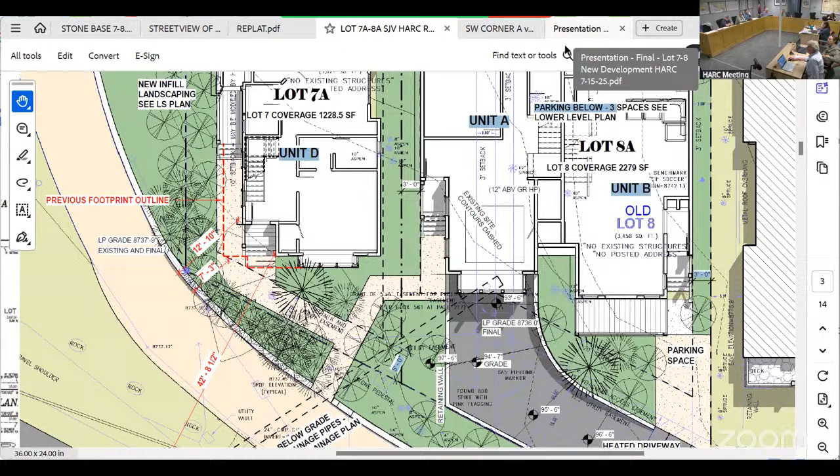I guess I'm one of the rare times I'm gonna agree with Stacy. I don't see it. When I look at the space you've got there, you've got the bike path to the road, that's gonna be landscaped in between there, I'm assuming by somebody. I don't have a problem with it. When I look at what he had before for that building and what's there now, I think it's much improved.

I don't have a problem with Unit A, the way that's been articulated with the deck. I have a little bit of a problem with Unit B, the far east unit, because you have such a tall, exposed brick surface there. I'm wondering if it'd be possible to step that at the upper level, not a deck, but just something that pushes it back a little bit and breaks that line above the second floor windows.

Are you talking about sort of a little awning roof, a projection? Like a little shed roof, kind of like what's on the bump out in the middle one? Similar to that, just a small shed, could be a couple feet, just to give that some articulation there.

And that would be, where would that be? On building B, how high? Between the second floor windows, well wherever the floor line comes in. And then just step that back a couple feet, put a little shed roof there. You don't have to put a deck, just step that whole piece slightly back. I don't think it would have a huge impact on the plan or what they're trying to do inside. And I think that's what they need to do.

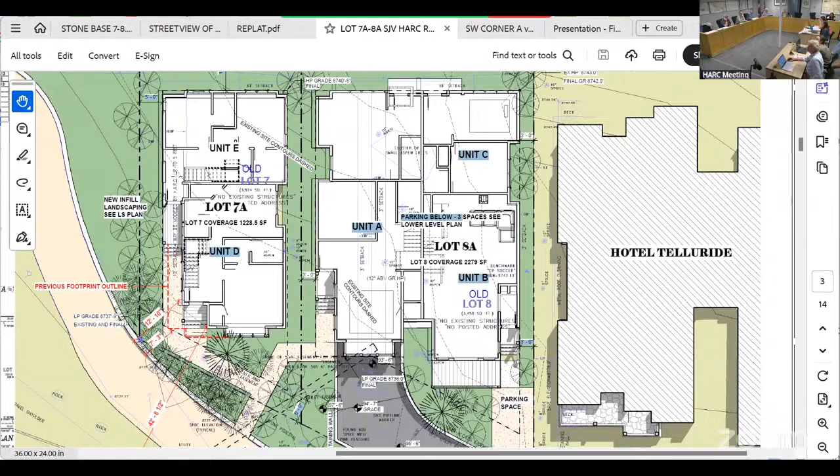Doesn't do anything to the southwest. Oh, it's just from the west. Yeah, the only place they're taking advantage of dropping it to a 5-foot setback, as they're proposing, is from the upper half of the building, the northern half, and the basement that's under the porch.

So I'll go down the list. Number one, I think they have improved, but I would agree with Matt, it needs to go back, in my belief. I'd like to see it at 10 feet. Maybe then we say, oh well, it could be 8, I don't know. But off the bike path, again, it's the entry, it needs to be back. I feel on this most sensitive corner left to build on as we enter town.

And I just think it needs to be back. I would concur with Bob's idea. Stacy almost had me swung with compliance because of the big hotel, but context of neighborhood, I still think the east building with a 2-foot setback and a shed roof would help break that facade up. On the middle building, number one, mass and scale, I'm uncertain about this big bay window appendage, especially, as Stacy noted, the appearance of almost 3 stories here. It just adds complication to this. I'd like to get some more feedback.

I particularly think it helps. To me, the garage and driveway doesn't bother me so much because it's very tight and it's 7 or 8 feet below grade, not completely buried. So I think that bay window absolutely helps the garage, providing relief and reducing the overall shadow effect of the door.

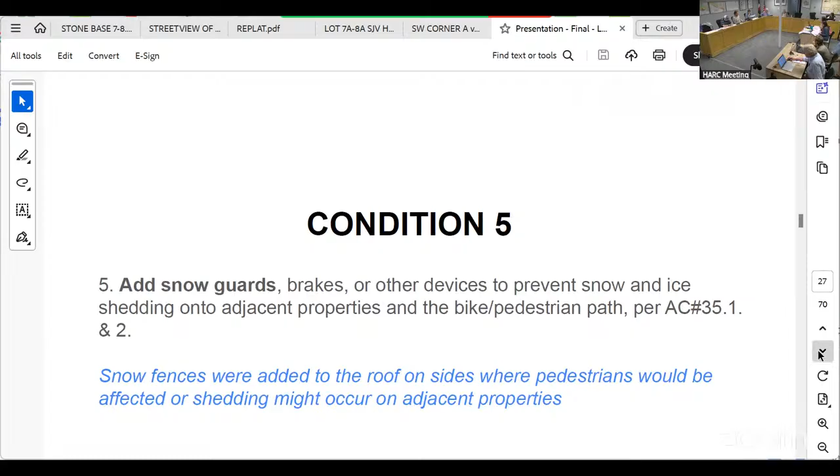Can they achieve that by reducing their roof slope? Is that what we want to see? I don't think so. Go to the drawing that showed the change you made - 912. I don't think you want to change that. I'm just getting it out there. Yeah, I don't think you'd want to change that.

You can see the gable going all the way up to the red dashed line previously - that line is the old roof. So to me it seems to step up with the grade, step up to the hotel. I'm fine with the changes they've made there. I don't see a problem with that. Okay, I don't need to take a straw poll, I can see that's washed out.

So I'm going to stand firm on the east building with a setback of at least 2 feet and a shed roof, and a 10-foot setback at the southwest corner. I thought of another way to do that maybe, and I agree with the brick on that rear gable on lot 7 - it's just overpowering.

I thought maybe for this addition - I even worked it out, you'd lose a bathroom, but not that we need to look at function, just trying to be reasonable - with that rear wooden section on lot 7 towards the ball fields, that appendage sticking out, I could see how they could come in from the back, maybe not the front. But look, if it's a 10-foot setback, I don't care, it's fine to stay as is. I think we should stay with it.

And then, so the brick, I guess except for that rear gable, that was a good idea. And the dormer was taken care of. So really, for me, it's just about the final mass and scale. I'll give up on the height of the middle building - there's at least 3 that say no.

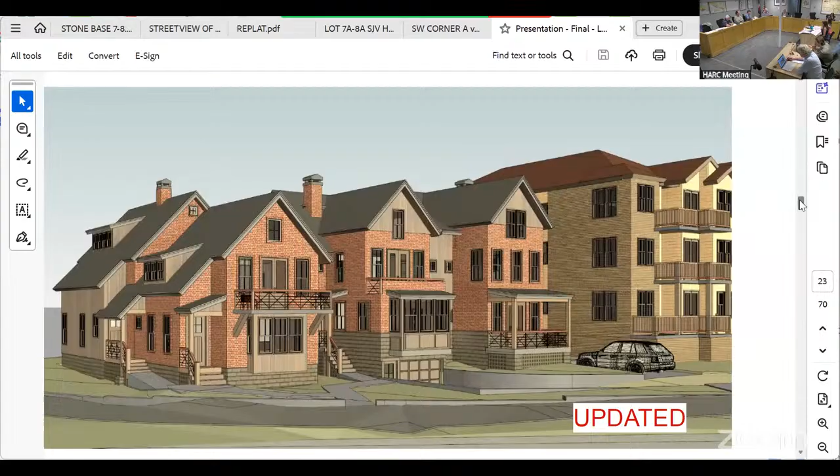That's my fear. So, Kieran, would you be the third vote - could we consider a minimum of 5 feet further setback of that, I'm sorry, is that E or is it D? Lot 7, unit D. Yeah, D. And we look at it and give us a visual down the street.

Did you see this one? Okay, we can't have any more dialogue. Okay, sorry, okay, I'd be fine with modifying that to see what 5 feet - a minimum - let's see what it looks like before we go off. It's additional 5 feet on the southwest corner, unit D, lot 7, on the front face, the front fascia, just imagining that whole mass as designed moving back 5 feet.

Ron, sorry, if the applicant could go back to the previous image. I just ask you, what are you protecting? You're protecting the view to unit A, you're protecting the view to a building just beyond it. You're not protecting views to the mountains, you're not protecting views to anything.

I don't think it's protecting views, space down on the street. I think it's just too much. I appreciate its introduction - number 1, the Colorado Avenue corridor, it's one of the things we kept going back to. I think you're the one that originally brought it up on the Tower House and the Canyonland projects.

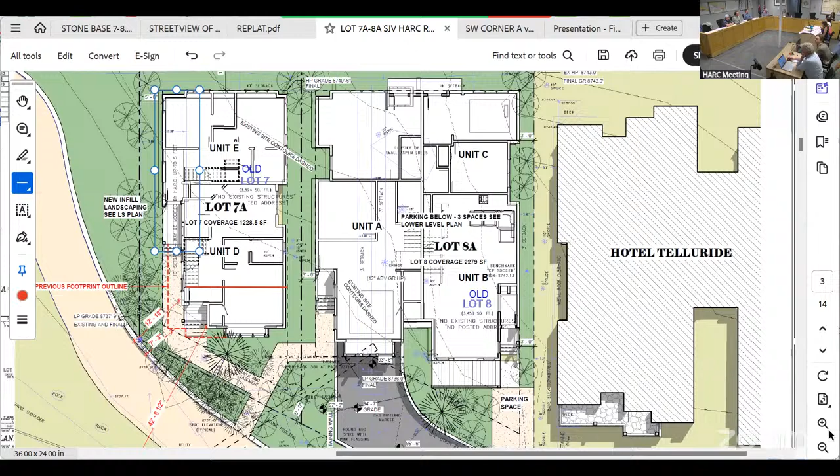Additional 5 feet from the setback - I think it would make a big difference. I think I'd like to see it. Sounds like we have 3 votes to see it, and then we can make a decision. We're not going to see it and then say, oh yeah, you're right, that's too much, let's go back to what you proposed last.

Well, I don't know, we're not going to do that. I don't know, but I know one thing - we're 68 feet back at the first Canyonlands building, just so you remember what we did. And I went down and looked at it today and measured it.

Just to clarify again, the unit E wall that's 5 feet from the west property line, can that stay? That's what I'm saying - I'm saying that we would allow them to reduce the western side yard setback from 10 feet to 5 feet, if they essentially increase the southern setback by at least an additional 5 feet. Yes.

Okay, right now we have 3 straw poll approvals to see that. And just to be clear, I'm not saying just take that setback line and move it to where it is now. I'm saying taking that entire mass and moving it back a minimum of 5 feet - moving the mass back north, not the setback. Let's not talk about the setback, let's just talk about the massing. I'm just trying to understand what we're trying to do here.

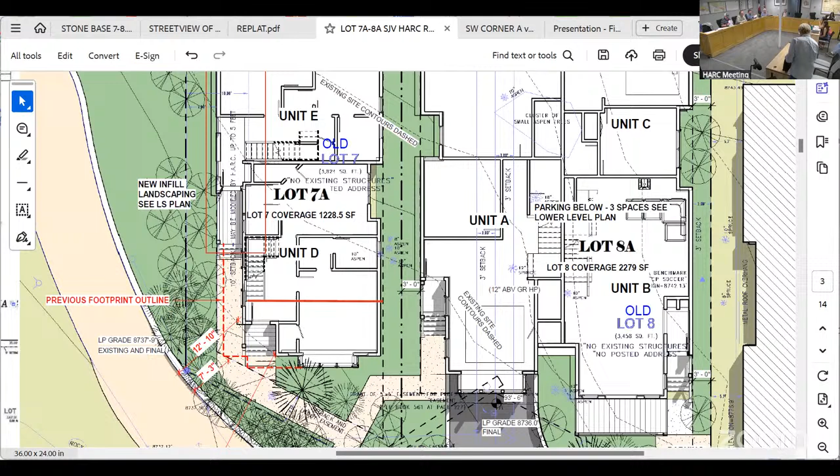Thank you, everybody, for your hard work on this tonight. And before we adjourn, past 8:30, only 5 minutes more. Well, I just wanted to say, maybe at the next meeting, that could be a long meeting. I found it interesting enough that I was going to maybe try to connect Kristen with their preservationist in Newport.

And again, 300 years of practice, but I'm going to give you 3 interesting things just to think about. Well, they haven't been in practice for 300 years. The buildings might be 300 years old, but they haven't had a historic district or a review board for 300 years. That's correct.

Number one, I thought it intriguing that in the rare circumstance, even over the last 10 years, no matter who the staff was, if we agreed carte blanche with all conditions as written, they could do a shortcut. Now you may find this interesting, and I'm not proposing it, I'm just saying - at the beginning of the meeting, the board could agree and issue what's called a summary judgment: no testimony, no questions, just issue it.

I've got about 8 of these, but I'm only going to give you 3 just to whet your appetite. What about public comment? No public comment. By the way, they only have 3 board members. Well, that's obviously kidding. I mean, I can help out if you want to go that direction.

They have been doing it since the 1880s. There was some sort of process, it wasn't called HARC, but it seems like we short-circuit the process. They have 10 to 15 projects every month on the board - this blew me away. You can imagine a bustling community like that.